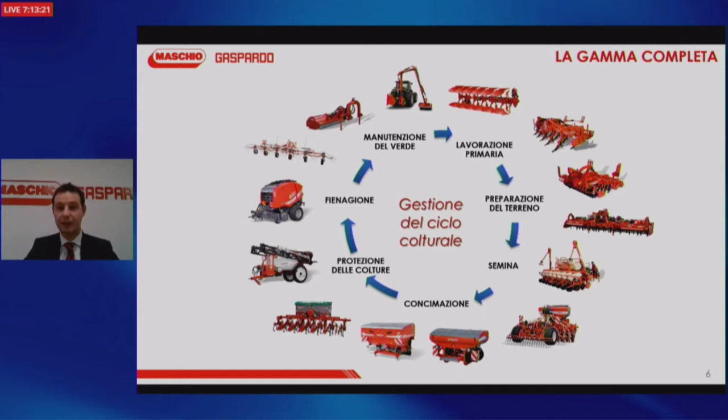Then we have green maintenance as well - flail mowers, for example, and also boom mowers. So we can provide solutions in several fields.

Now let's focus on the most important part of our presentation today, which is the Isotronic technology for Agriculture 4.0, which is the most topical and burning issue in Italy and elsewhere - particularly in Italy, because now we've got tax reliefs for people who want to invest in digital technology in agriculture. So the market is doing fairly well in Italy because of these tax incentives.

Now, Agriculture 4.0 - but we have to start from Industry 1.0. Nowadays we've got Industry 4.0, the fourth industrial revolution. As you know, the development of the economy goes through several industrial revolutions. We are witnessing the fourth industrial revolution with the development of digital technologies, which are blended with previous technologies.

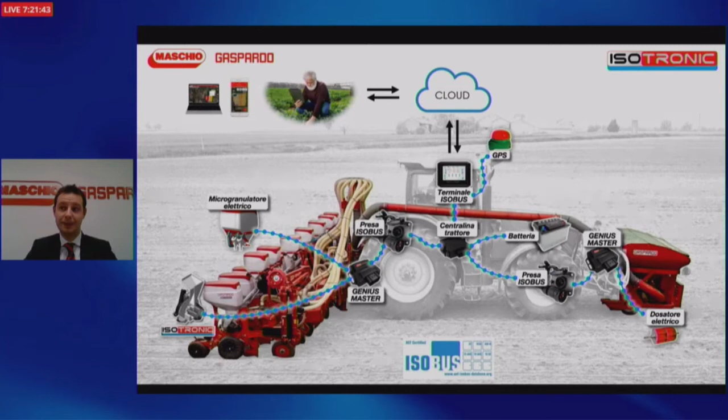All the data goes through an Isobus terminal, which allows us to control the tractor and the two implements, the hopper and the other. Thanks to the most accurate data, we can better connect and use this data. There are also tax incentives for those who invest in this field in Italy, and through your computer or smartphone, you can communicate data - the cloud communicates with the individual farmer. This gives you an idea of how the system works. Maschio Gaspardo has believed in this communication system because it's the most exhaustive, complete, secure and effective system providing high quality data.

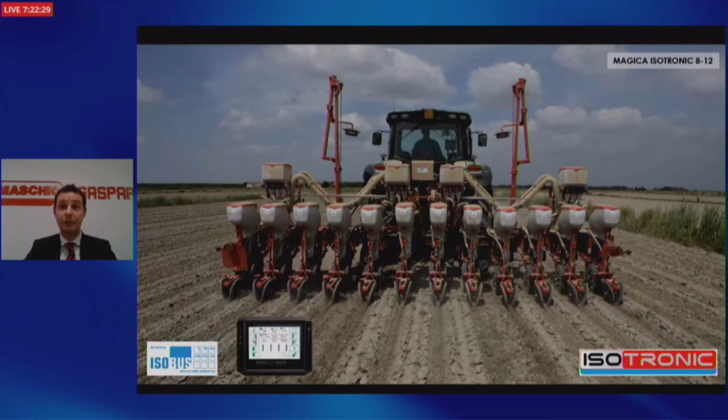Isotronic is our product brand - Iso makes reference to Isobus, and Tronic makes reference to electric transmission. We have the Chrono 916 high velocity planter. I'll give you some details of how the system works, so these machines can be controlled easily. Also in this case, this is Magica - not high speed, but Isotronic anyway.

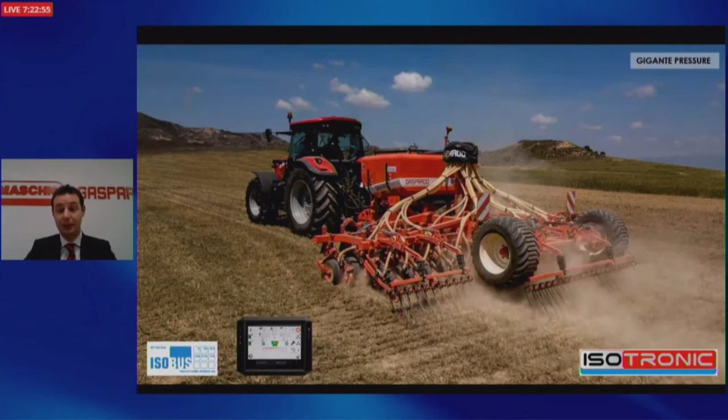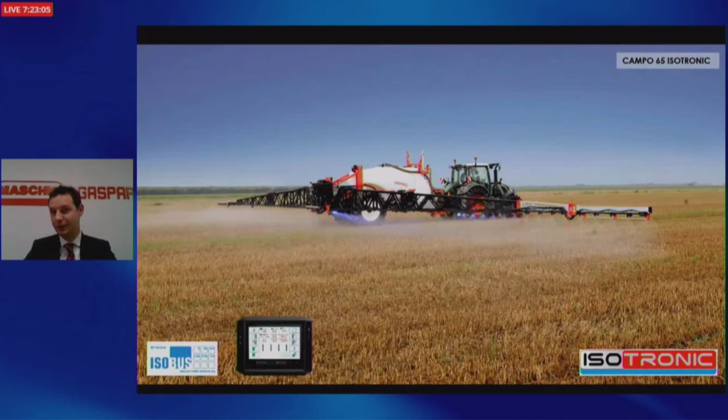Also for cereal farming, all the precision cereal seeding machines have Isotronic versions that are improved and optimized. We also have other types of products - I work with planting and seeding, so you'll see many images about these types of machines. But in your next webinars, you'll see other products.

This is Tempo Ultra, another product which is going to be presented in a few days. And we also launched Primo, this new Primo EW Isotronic - with this we can provide the best possible solutions for 4.0 agriculture.

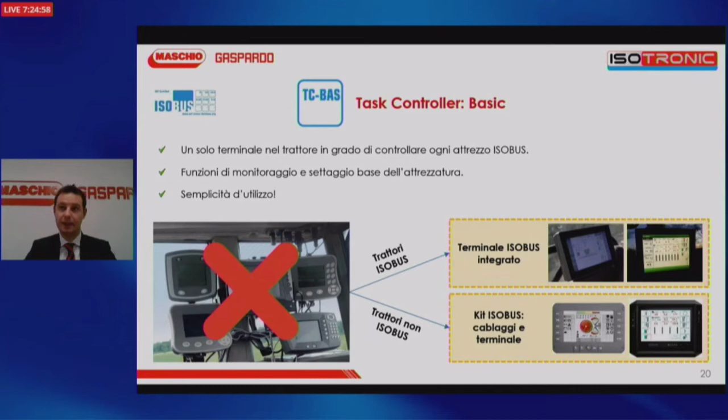Now let's go back to some details with Isobus and Isotronic, Gaspardo Isotronic. The basic task controller function allows us to send data that the equipment or implement generates, and send exhaustive documentation which can be analyzed with distant farming platforms available on the market.

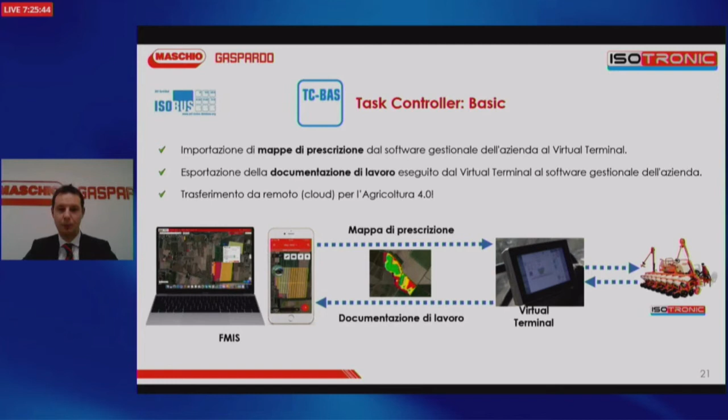Also, thanks to this basic function, one can send to the tractor terminal, which can be inbuilt or added, the ability to download prescription maps which help with variable dosing or variable sowing operations. So variable rate - you can see in the past, and now these data are being transmitted through the cloud, and this is the future of the cloud.

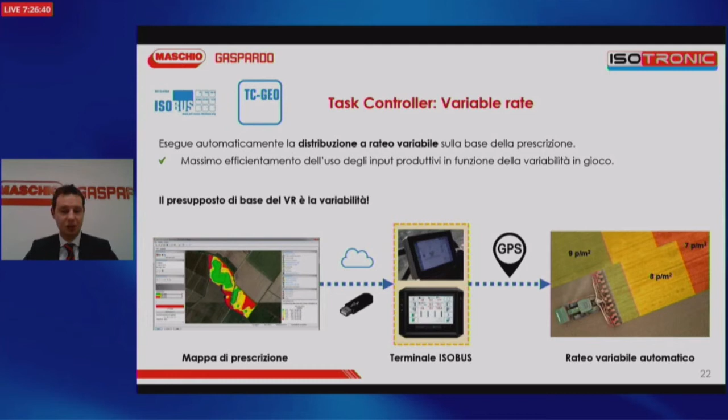What do we mean by variable rate? We mean input variable rate - the fertilizer we want to distribute, to spread the product based on the variable potential. Through this technique, this system, we can have a variable rate of distribution, meaning we are more efficient in distributing the fertilizers or seeds, and this may change based on climate, the weather, etc.

Another function found in our Isotronic machines is the section control, automatic section control, which is always available manually, and in this case it's also available automatically.

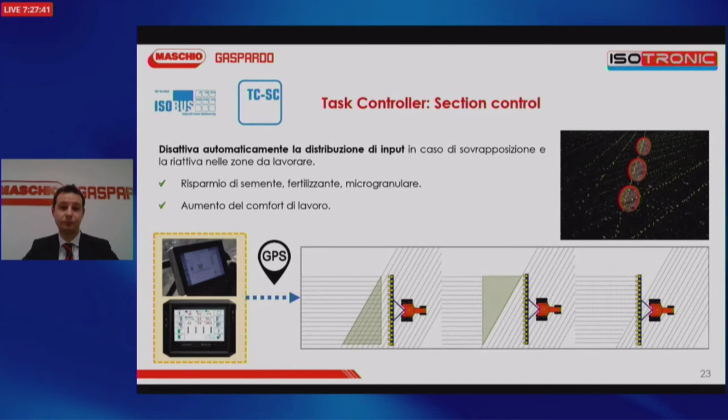You can save fertilizers and save seeds by closing certain sections and reactivating them later, to avoid the same seed or fertilizer being distributed on the same area twice. Farmers need to save as much as possible and don't want to waste material.

Now the third part of my presentation will focus on Chrono, a technology we launched in 2017 in Hanover at the trade fair. This is a high-speed planting technology.

This is a technology we are launching on the market with a set of new planting machines. Maschio Gaspardo has followed the whole evolution of precision seeding, starting with Friuli, the first machine, the 730, then double disc machines, then electric Isobus, Isotronic transmission, and now Chrono.

So you can see a remarkable evolution. This slide speaks for itself. With Maschio Gaspardo, evolution is our motto. We are very proud of our product today because you can work with this machine at double the speed you would have with other machines. We're really proud of what we can obtain.

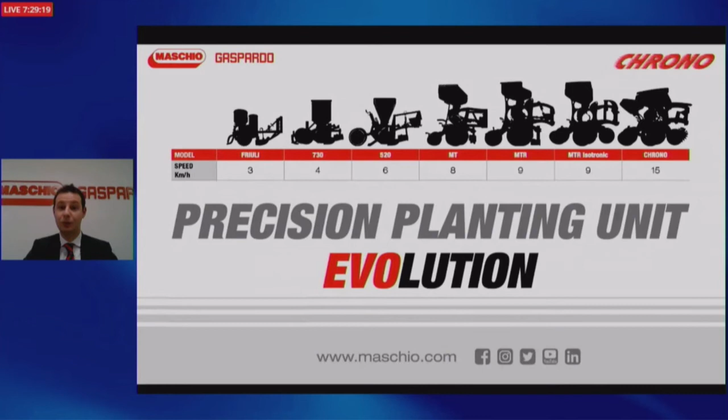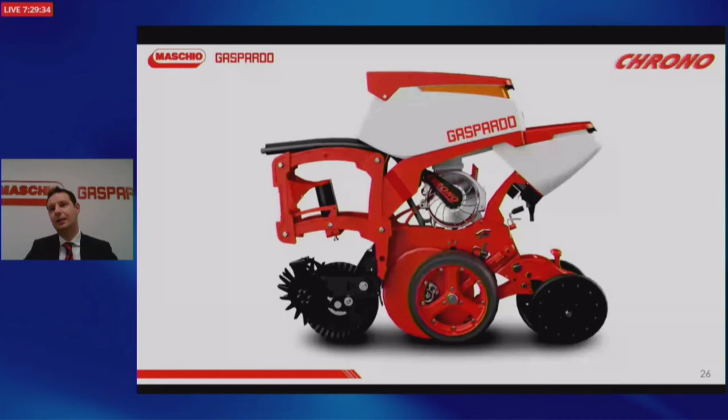The system has specific features that make it much better than its competitors. This is the Chrono element, the technology we can supply. We've worked on the technology itself, but also on the design, to convey a message of innovation, of something that is the future in the field of precision farming.

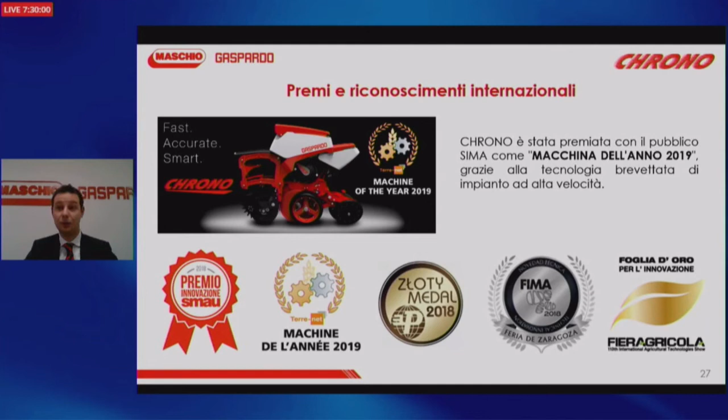And the market has recognized us. We have presented this product on several occasions and have always been awarded prizes. In Paris we received the Machine of the Year award 2019, the most prestigious prize, but we also got prizes in Poznań, Verona, Zaragoza, etc.

So Chrono is a high-speed planter. The main benefit here is time, the amount of time you save, because the machine is very fast, which means you finish earlier, you can be very timely, you can optimize your own agendas. But there are also economic benefits, because there are lower costs and the yield improves, and I'll tell you why.

There are also some more farming-related issues. We can be more precise in the distance because of the very nature of the system. It's a precision system, and also the depth of seeding is homogeneous.

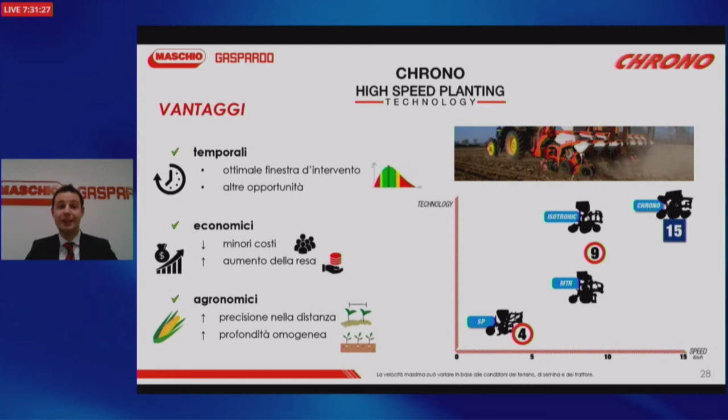On the right-hand side you can see how we positioned this system, our seeding concept, which is a vanguard technology that helps us sow at high speed, 15 kilometers per hour, and this technology can even exceed this very good result.

Now let's go back to the farming-related benefits provided by Chrono. First of all, the SP element, which allowed for the growth of agriculture in Italy, is now much more precise because this system was very accurate, and this was the case in the past. But then there was an improvement with double disc machines, the MTR machines.

So the SPs were the first, then we had MTRs, which also had the benefit of a homogeneous depth of seed placing. Even in the case of stony, irregular soil, the depth is homogeneous with MTR.

Then in the last 10 years, there was an additional benefit with the introduction of the Isotronic electric transmission, Isobus controlled systems. So we can really optimize precision agriculture, and Chrono is all these benefits put together.

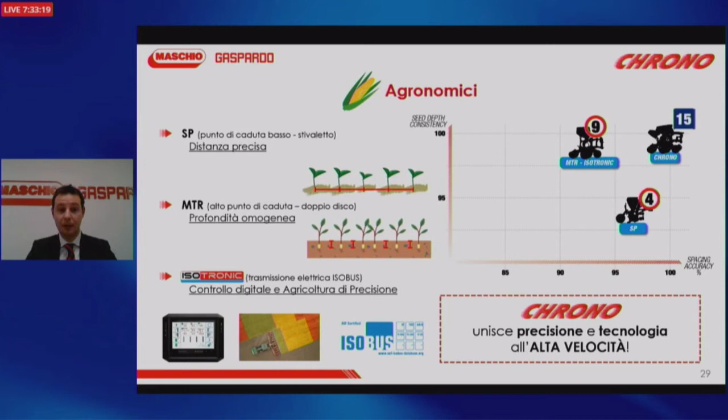So SP, MTR, Isotronic, etc. Why? Because Chrono can be more precise, more accurate than all the other machines available on the market. It is very accurate in terms of depth, and it puts together all the technologies we have developed with Isotronic in terms of precision and Agriculture 4.0.

You can see this element here, the chronocentre, which is at the very heart of this element. The system conveys the seed from the distributor to the furrow, and it can be set with variable regulation.

This means that this system is different from the other systems we find on the market. So this is a high-speed and precision system at the same time.

You can see here the spring, the air spring, because at each seeding there is an air-charged spring, controlled by Isobus. In this way, we can control the pressure of planting of seed placement. This is important because the air spring can apply up to 300 kilograms per unit.

In our seeding concept today, we want a solution which is versatile from all points of view, because agriculture nowadays involves different, heterogeneous conditions. You can have tilled, minimally tilled, or hard no-till ground, and there can be different seeds which require different depths and different textures.

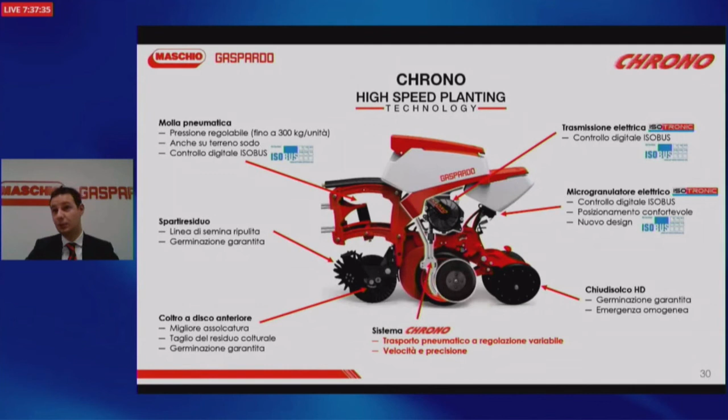We also have the chrono system, which transfers the seed to the soil. And then we have a furrow closing device, HD, because also in mini-till soil conditions, the sowing furrow can be closed properly. There are other devices too, for example a small rubber wheel which presses the seeds in the furrow to facilitate future development.

This is the chrono system in another configuration. We have two systems here. The first is the changing pressure, which happens in standard planters like our MTRs, a pressure change system to convey the seeds to the planting or seeding disc.

But also in this case we have a pressure system. The first one was a pressure change, that is a depression, whereas we also have the pressure of the seeding device, which makes high speed possible.

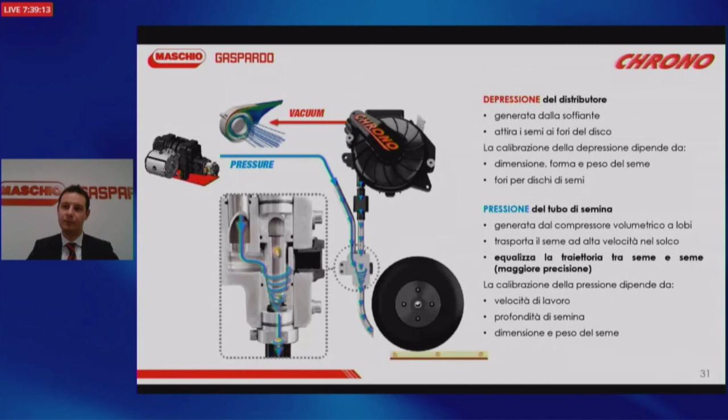As I was saying, the airflow, which is so important for the actual seeding, can be regulated and set according to needs. It is possible to really regulate this airflow to maximize seeding pressure. The precise seeding pressure is not always the same, quite the contrary, because it is based on the depth of sowing and the speed of the actual sowing operation.

Let's now see the features of the distributor of seeds.

We have, as I was saying, a new distributor of seeds. This is an innovation at home for the Chrono system. It is patented and completely new. It is still transfer of the seed in a precise way through a sort of pipe.

And then there is this intermediate device that avoids damage, by means of a vacuum system. It is fixed to the disk, so there is no wear. Then there is an aluminium lid which can be removed easily, allowing access to the body of the distributor for maintenance.

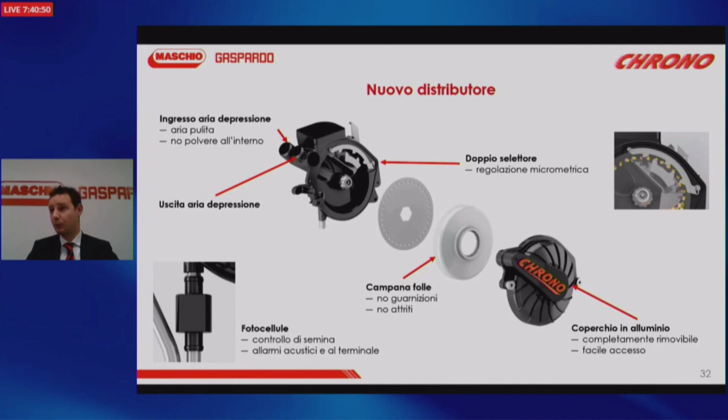And of course, if there are abnormalities, the virtual terminal is immediately informed about this, and this makes it possible to intervene in a very precise, micrometric way.

Now, going back to the issue of the actual placement of the seeds, what is the advantage in Chrono? We can regulate and change the airflow based on the type of seed. So if we move from corn, which is very large, to sunflower or soy, the pressure we set is high, whereas for smaller seeds we have lower pressure, as in the case of sugar beet or sorghum.

This is important for the seeding depth. For example, if there is no opportunity to regulate the airflow, and the flow is the same as for corn when seeding sorghum, there is a risk of causing an error in the actual seeding, which is not acceptable for sugar beet, because the pressure would be too high for a small seed. So in the case of Chrono, I think our best point is that we can regulate, we can vary, we can set the airflow so that the seeding pressure can be changed according to needs.

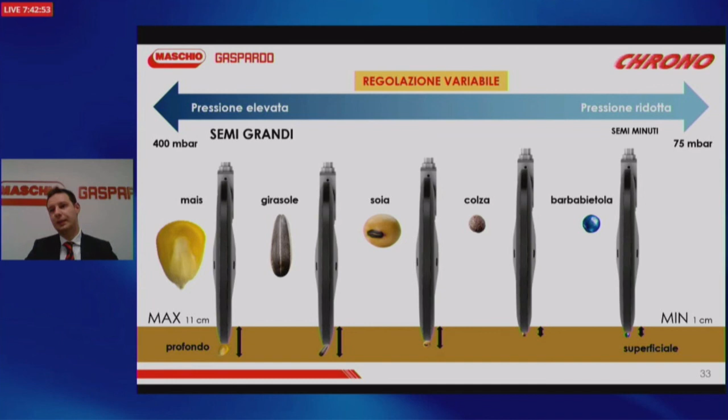Farmers and contractors really have asked us to do something about this, for things like sugar beet, rape seeds, and sorghum.